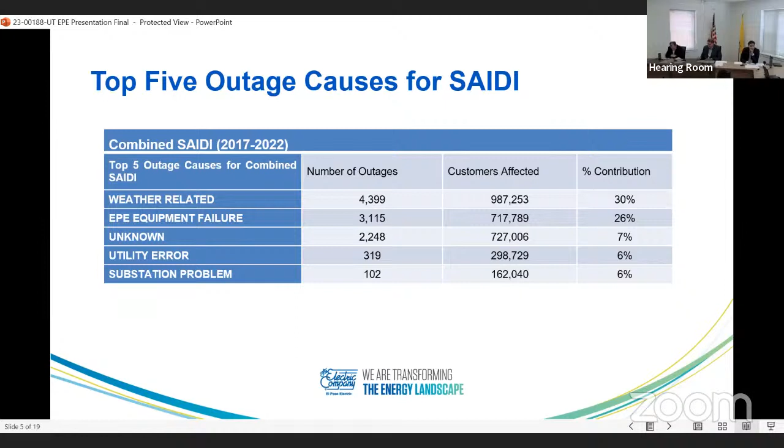And one thing to point out too, as far as major events, is we do prepare before a major event. We have a very robust—in my opinion—preparation for a storm before it rolls in, if it's foreseeable. And I believe that's all I have from my section. I can pass it on to Ty unless there's any more questions.

All right, thank you, Jason. As Nancy said, I'm Ty Pollard, Manager of Distribution Systems.

The section I'm going to go over are five of our programs that are reliability metric based or other reliability factors. Those programs include the worst performing feeder analysis program, the pole inspection program, our cable replacement program, transformer threshold capacity analysis, and our vegetation management program.

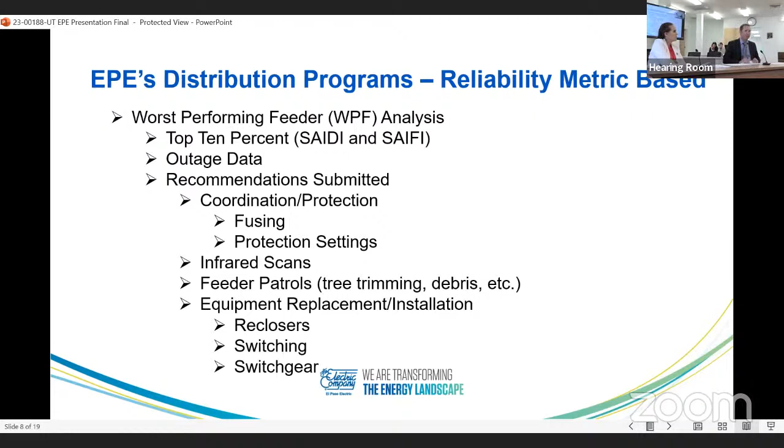So we take efforts to make sure that the worst performing feeder is not a concurrent hitter on our system. For this program, it's essentially a year of performance and then a year of correction, unless we have other concurrent issues, if it's a double hitter, things like that.

Our next program is our pole inspection program. We've sectionalized the entire service territory for both New Mexico and Texas into a series of grids. Within these grids, we have maybe a single structure up to thousands of structures. We do analysis on the age of the structures, looking for structures that are 10 years and older, or if a worst performing feeder circuit travels through or touches a grid.

We'll elect to perform in New Mexico 3,500 to 7,000 pole inspections in a given year. Our target is to attempt to get to a 10-year cycle. Right now we vary between 10 and 20 years, because with the consultant we're working with, we found that we start seeing failures at about 20 years, so we're trying to get ahead of that.

We also have a cable replacement program. This is a geographical program where we'll look at specific areas, maybe a couple of blocks or maybe a larger area, and we'll focus on the area with the most cable failures within that given year.

Then we'll focus efforts again in the current year to perform replacements. This doesn't have any input from SAIDI or SAIFI metrics; it's totally geographic, but we do consider it a reliability improvement program.

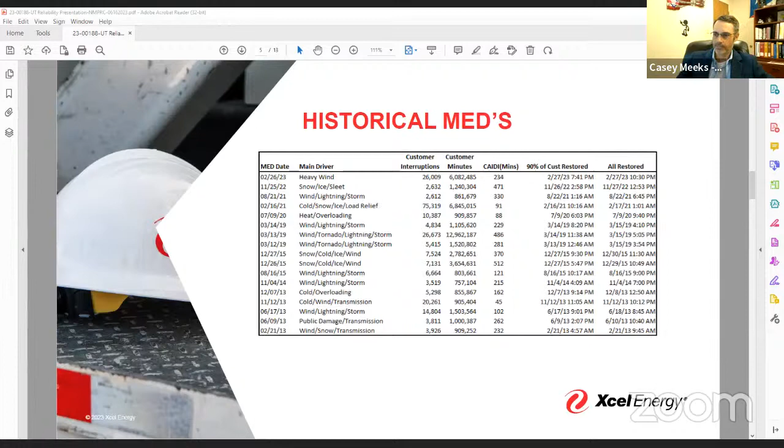Just a quick comment on geography. SPS has a very large rural footprint in New Mexico, probably a little different on customer base from most utilities. 60% of our sales are to large commercial and industrial, specifically oil and gas customers. You'll note that we have fairly big geographic footprints in the Lea and Eddy County areas. We have basically the full southern 3/4 of Lea County and about the southern half of Eddy County.

So a little different situation than some utilities. If you look at the Roswell, Artesia, Dexter, Hagerman, and Clovis and Portales area, up further north, Tucumcari as well, if they're on an island, those are a little more traditional for the investor-owned utilities, where we have co-ops surrounding those incorporated areas.

Worst performing feeders - similar to what you've heard here, we do keep close tabs on these poor performing feeders. We focus time and dollars on ensuring that the same feeders don't show up frequently on the list. We have multiple programs that utilize that data to try to impact these results.

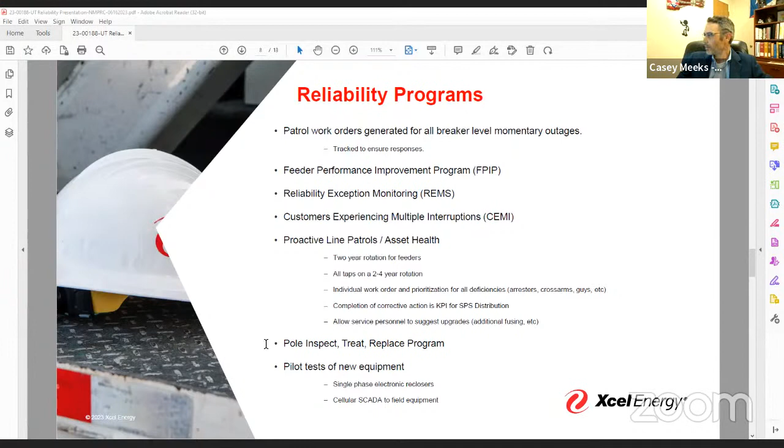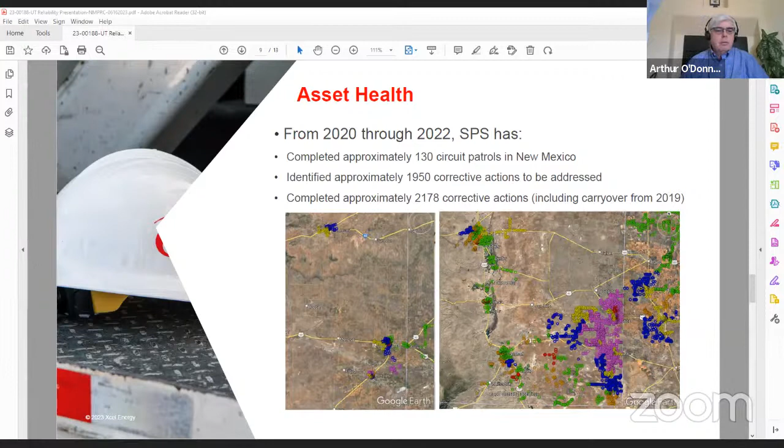Casey, I'm sorry to interject, but we are getting a lot of static. I'm wondering if you can turn the camera off your computer or laptop, and if that will free up some bandwidth without interfering with your sharing of the screen. I'll give it a try. Okay, let's hear you now. Better? Yeah, it's still there. We'll carry on. You can come back to us if you wish. How about now? Oh, much better. Yeah, sorry, it was on a different microphone apparently. My apologies. Thank you.

Okay, so the next slide here, just a couple of screenshots to show highlights from the programs I just mentioned. Asset health program, again proactive patrols resulting in corrective action work on the system from 2020 through 2022. We picked dates where we could pull quick and fairly readily available data. We've changed the methodology on that program a couple of times since we started it in late 2017. 2018 was really the first full year of patrols. From 2020 through 2022, we've completed approximately 130 circuit patrols in New Mexico, 1,950 corrective actions to be addressed, and we completed 2,178.

The screenshots kind of show the picture. You can see Tucumcari and Clovis on the left side, and then the southeastern New Mexico portion of the territory on the right hand side. So a substantial amount of work, again all intended specifically for improving reliability of these lines.

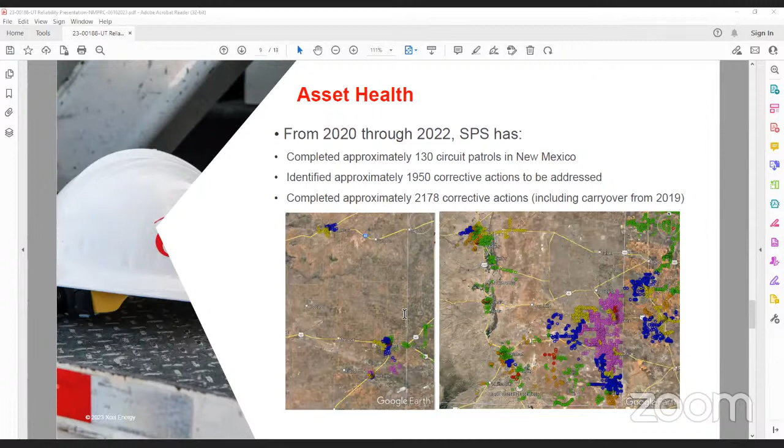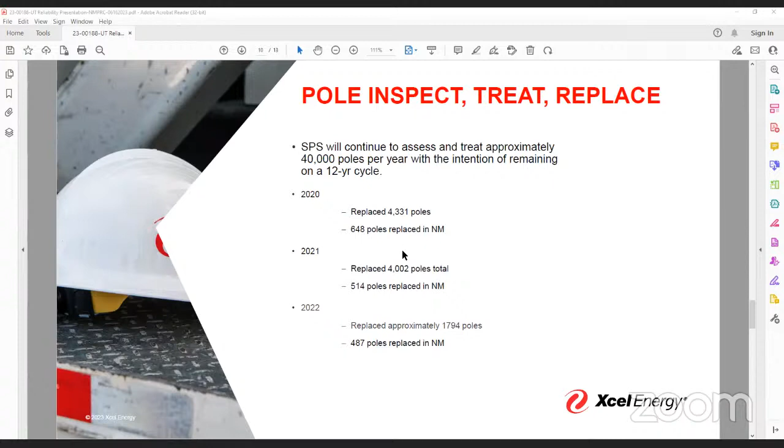Pole inspect and treat program, again just some numbers here for context. About 40,000 poles per year are assessed and treated, our total system count is closer to 440,000 poles in SPS at this point. So somewhere around that number, again intended on a 12-year cycle. We replaced 4,300 poles, 648 of those in New Mexico, and you can see the other numbers there. I won't belabor this. This does not include the numbers that were trussed, which are typically about a quarter of the issue poles that we find are candidates for trussing. Trussing is an economical option on some poles. We are selective with which poles we truss, but it is a portion of this program worth mentioning as well.

And then a quick note, I think this is apropos here. There's been a couple of questions about technology and plans for the future. Our ADMS program is really just getting stood up in SPS.

We're in the process of installing a FAN network, focusing on Texas right now. We'll move to New Mexico, hopefully later this year or early next year, and really start building out our field area network. We're also looking to start installing advanced metering at some point. That's the first step of this.

A little further down, and potentially much more impactful to reliability, is the FLISR - fault location, isolation, and restoration equipment. So basically automation on our system where it can sense a fault, open a switch, close a switch, and restore power to customers while isolating the damaged areas.

I think there's a lot of potential for both the ADMS system and visibility from an automated meter system, where we can really make use of that data and try to find trends we haven't been able to see to date. The AMI will be a great step, but once we get to the point where we can install intelligent equipment out on the system, it's going to make a huge difference for us, particularly in our very rural footprint, where it takes crews substantial time to respond to events out in some of these rural areas.

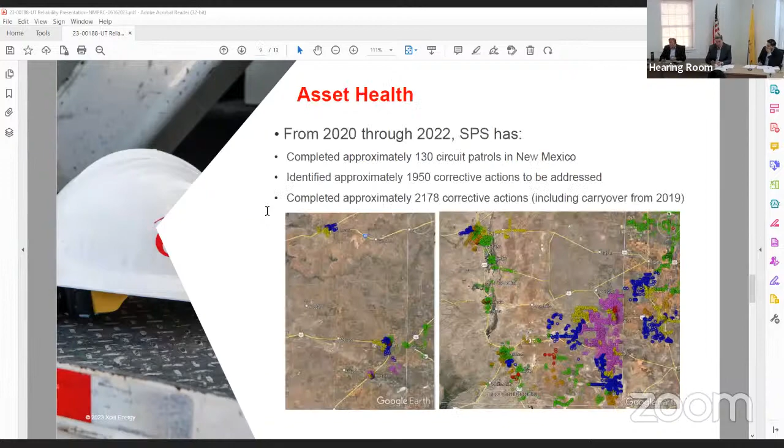One question on page 7 of what you sent us, this annual reliability report. Is that a typo, the 2018 SAIDI number? Yes, apologies, I didn't catch that until today. It should be 106 since there were no MEDs that year, so it's the same numbers as on the right hand side. Okay.

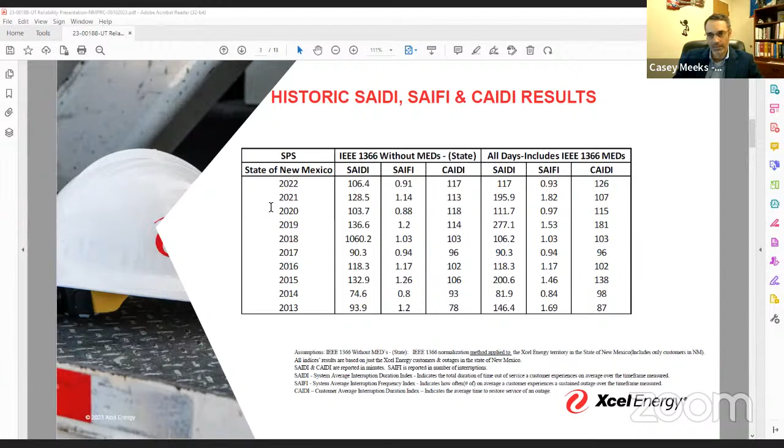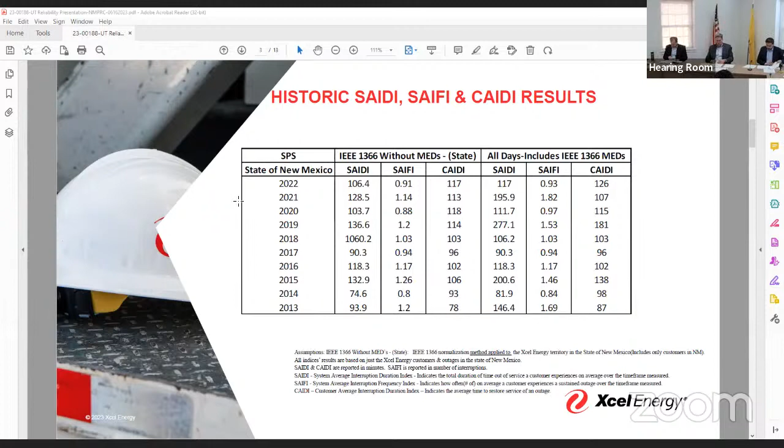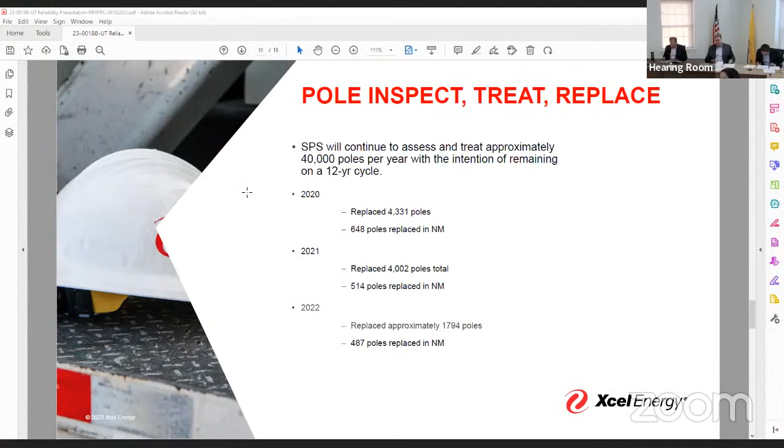And table 4, are all 3 of these years year to date April? Can you help me out with table 4? So I've got the 10 worst performing feeders circuits - it's on page 8 of the document you folks sent us. It says IEEE state normalized distribution lines only, and it's got the 10 worst performing feeders in each year. That is a good question. I'm assuming we probably did that to baseline on 2023, but I'll have to circle back with you to get a good answer there. Okay, that's fine.

I'll just ask the same question I asked before, although you did sort of answer this as you were going. But if you could maybe just recap the room for improvement that you see, or if there's anything you notice that you might want to do differently.

Good question. I think the programs and the approach that we have to reliability is pretty well grounded at this point. There's always something to learn, as Wes mentioned as well. I think if I could take anything away from the information pulled here, it would be to take a closer look at the 4, 8, and 12-hour restoration times, just to see if there's anything there we could potentially incorporate or learn from.